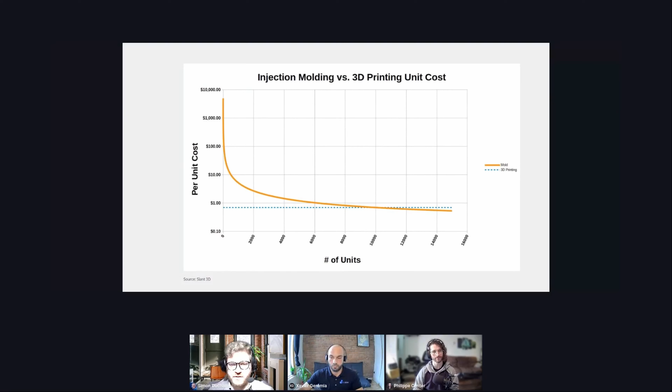Even if 3D printing is gaining more ground, there are still some barriers to implementing it in industries. The principal reason is the high initial cost of additive manufacturing, but also the quality of printed parts not being good enough. One interesting barrier is the general perception that material choice is too small.

We'll see later on, but these are specifically the aspects that can be solved by using what we call high flow rate 3D printing technology. Besides the barriers to adopting 3D printing, actual additive manufacturing users generally want a better and bigger portfolio of 3D printable materials, but would also want more reliable technologies and more sustainability.

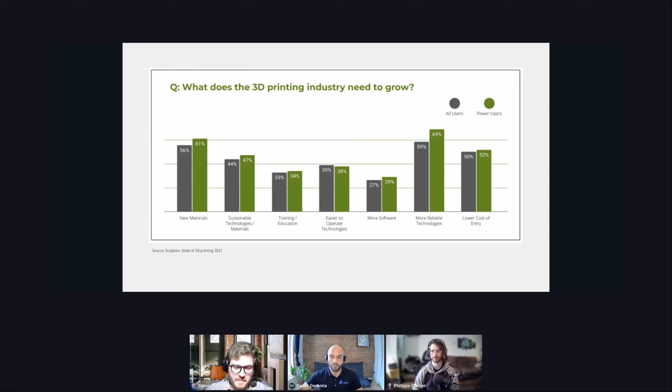When it comes to the additive manufacturing industry, there are mainly 7 technologies: material extrusion, vat polymerization, material jetting, binder jetting, powder bed fusion for polymers and for metal, direct energy deposition, and sheet lamination. I won't go and explain each technology, but I simply wanted to state that today's webinar will be focused solely on material extrusion technology.

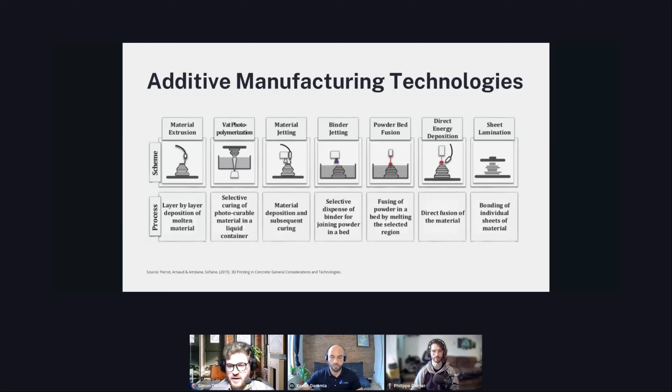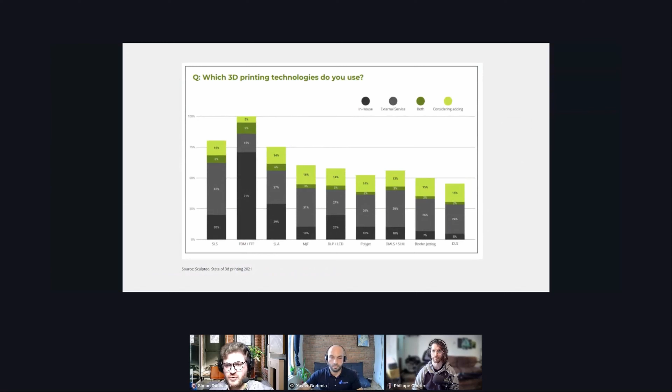To note, still today material extrusion is the more commonly used technology, both by in-house manufacturing departments and by external services like 3D printing service companies.

That's what leads us to talk in more depth about the material extrusion technology, commonly known as fused filament fabrication, fused deposition modeling, or fused granulate fabrication. There's still a lack today of standardization regarding naming conventions, but we generally prefer to talk about MEX, or material extrusion, rather than using each term that refers to a subtype of the material extrusion technology.

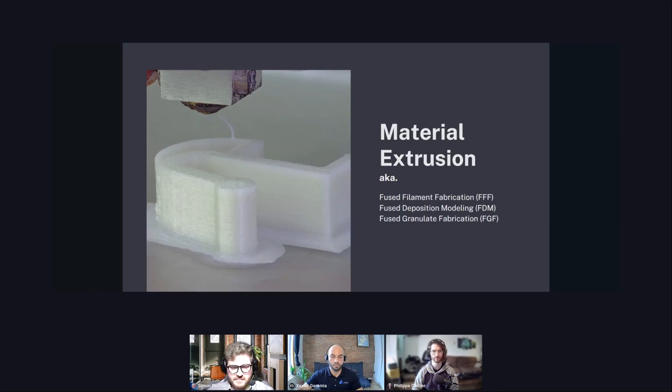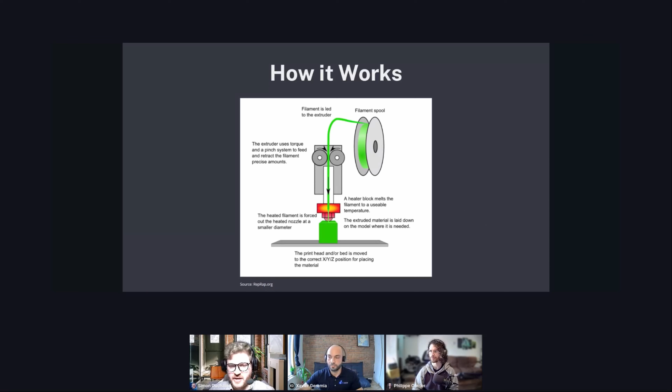So what's material extrusion? In short, it's a process where a raw material is taken, in the form of a plastic filament, but sometimes it could be powder, pellets, or paste. That material is fed through an extruder, a mechanism that moves the material to a melting zone. In this example, the extruder is a pinch system grabbing the filament and bringing the material into the melt zone, sometimes called a hot end, and deposited through a nozzle on a surface to create a shape layer by layer.

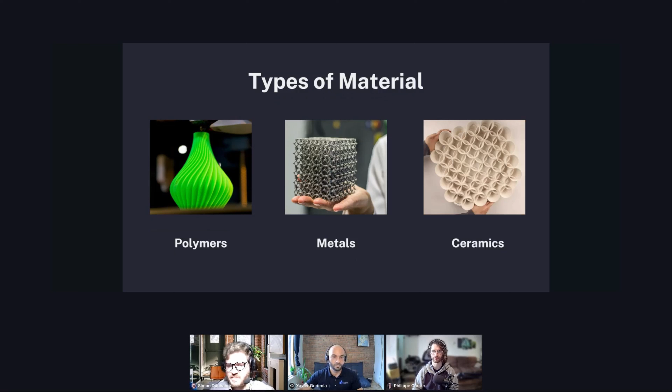In material extrusion, different types of material can be used. The most popular being polymers, but metal is also possible with material extrusion technology, as well as ceramic. And in more exotic applications, you could see bioprinting or even food printing.

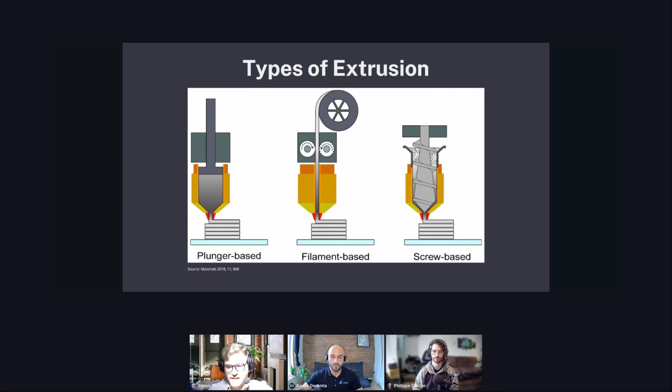And then finally, there is the screw-based type, where you use powder or pellets. Basically, it's a motor that turns an endless screw to move the material all the way through the melting zone.

All that said, let's go to the second part of that webinar. But before diving a bit deeper into our main topic today, high flow rate printing, let's take a few moments to go over the different types of 3D printers being used nowadays in industrial applications and see why high flow extrusion is a critical factor when it comes to small production runs.

Let's dive a bit more into each printer segment and see the pros and cons of those printer types. Please take into account that this is our own segmentation, as there is yet no official segmentation. Some would provide different printer types based on printer cost, others on material type, things like that. Here we decided to segment based on the form factor, or rather the build volume of the overall machines.

So the first one is the desktop 3D printer. It's a good pick for printing small parts with high resolution. The extrusion system is generally made to print layers and shells with a nozzle of 0.4 millimeter, making the surface finish almost not visible. In the case of the desktop printer, having a high flow extrusion system isn't necessarily critical. You could still get reasonable printing time for larger pieces, but as an indicator, it would take about 500 hours to completely fill the build volume of, let's say, a Prusa printer, with 0.3 to 0.4 millimeter width shells.

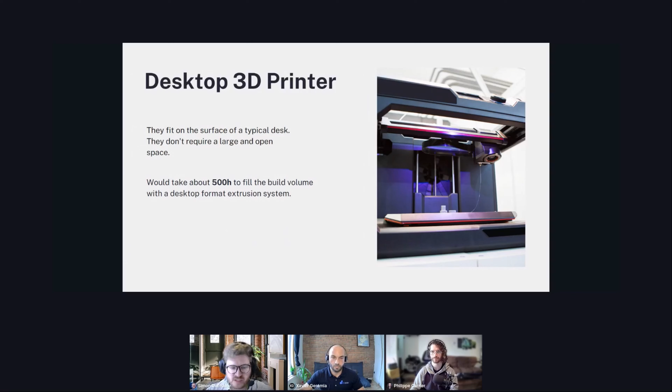The second one is what we like to call the industrial 3D printer, basically a mid-sized machine from 0.5 meter to 1 meter build volume. Unlike most desktop machines, it can take high temperature material or any advanced material due to the heated environment or abrasion resistant components. Generally it's a bit more reliable, as most of the time industrial 3D printers use better quality components. However, they are somewhat costly and you need expertise to operate those kinds of machines.

For those mid-size printers, considering a high-flow extrusion system might be a good idea. Using the same indicator as the desktop printer, we calculated that it would take 6,500 hours, so about 8 months, to completely fill the build volume with a desktop format extruder. That's basically 13 times longer than a desktop printer.

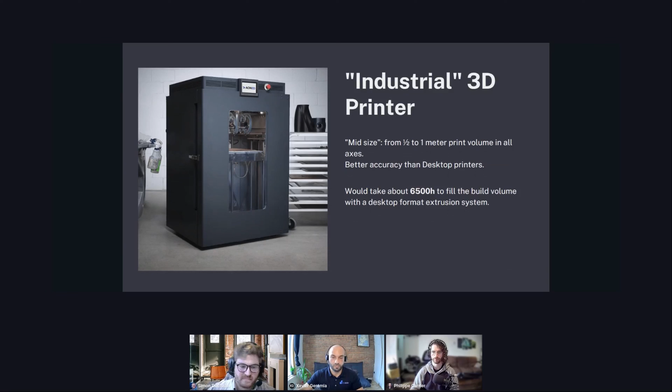The final type is the large format 3D printer. It's all in the name. Those machines are designed to print big pieces all in one part, or multiple pieces on the same machine. If you're looking for high resolution pieces, it can actually do it, but generally you'll pick that kind of machine for printing bigger parts where resolution isn't the main goal. You'll use nozzle sizes like 1.2 millimeter and print bigger shells.

The problem is that most of the time, the extrusion system used on those machines is inadequate for a large format. As an example, using the previous indicator, it would take more than 36,000 hours to completely fill the build volume with a desktop format extruder. With a large format 3D printer, using a high flow rate extruder is really critical.

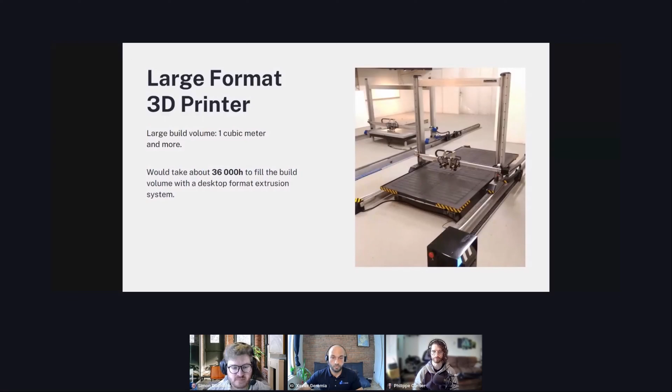Now let's cover the core of today's presentation: high flow rate 3D printing. High flow rate doesn't necessarily mean high movement speed. Building a part faster can consist of layering thicker layers on a regular 3D printer that isn't designed for tremendous acceleration and travel speed. There are many advantages to thicker layers, both for the machine design and the part strength.

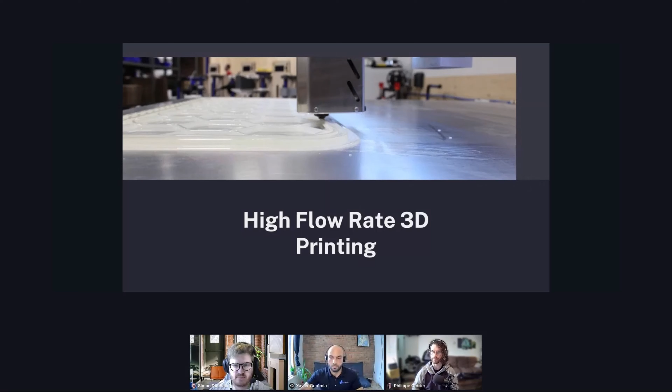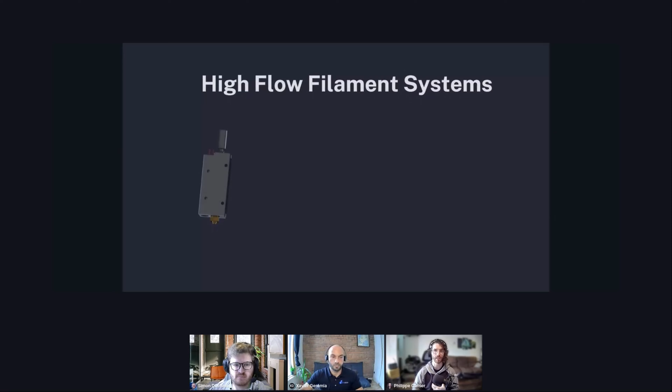I'll start with filament-based high-flow extrusion and then follow with pellets-based high-flow extrusion. One way to increase productivity is using a high-flow or high-output filament extruder. The extruder throughput is the limiting factor for printing speed, where a printer can easily move the carriage faster than the extrusion system can deposit the material. Using a high-flow extruder removes this bottleneck, each printer being able to make a 3D printed part faster.

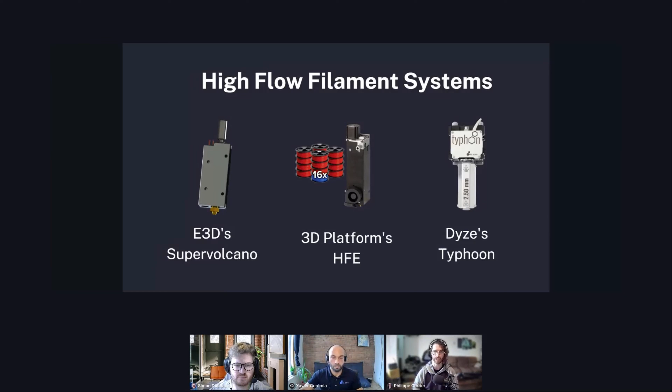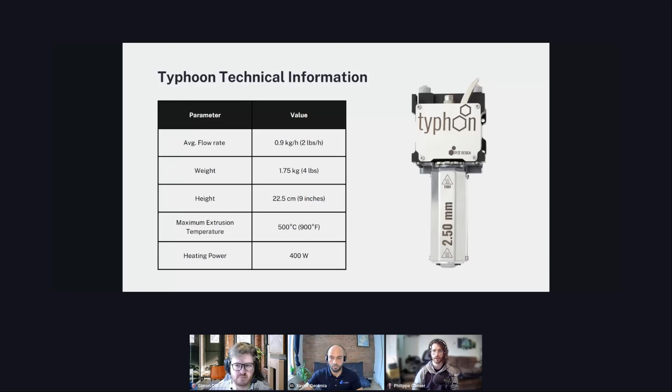There are already a few solutions on the market, each with their own advantages and disadvantages: E3D Supervolcano, 3D Platform's HFE, and our own Typhoon extruder. Typhoon is described as a high flow and fast print all-in-one extrusion tool head specifically designed for industrial large-scale 3D printers. This print head is designed to extrude 2.85 millimeter filament, is compatible with standard firmwares, and is capable of delivering an average flow of 200 cubic millimeters per second, which is about 0.9 kilogram per hour. This means quicker print at high deposit rate.

High flow isn't all about volumetric flow rate. It's also about constancy. An extruder like the Typhoon has a quad drive system for a reason. As you can see on the graph on the right, both single drive and dual drive systems suffer from a drop in efficiency the faster they go. It translates to inconsistent line width through the print, making it harder to obtain precise dimension when the throughput isn't predictable. This is the reason why the Typhoon has 4 driving wheels for fast and predictable flow.

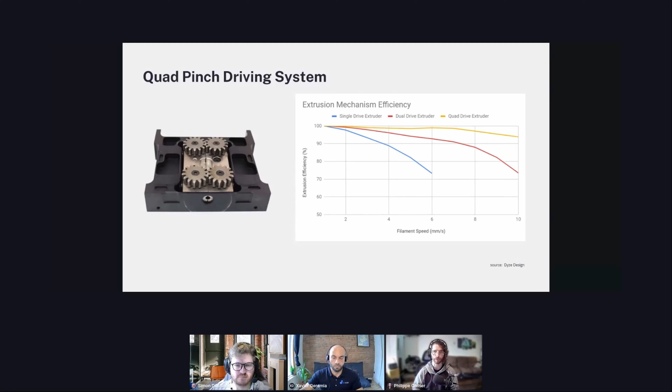If we compare the Typhoon to a standard hot end like our Dyzend X, we see about 6 to 10 times faster flow. Both extrusion systems are using the biggest nozzle available to them. We can also see that the Typhoon throughput scales much better with temperature, thanks to the dual heating and longer melting zone.

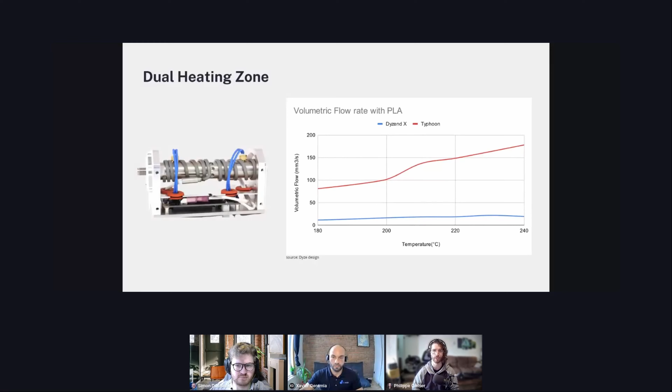We advertise the Typhoon as 200 cubic millimeters per second, but that's an average flow rate because, as you can see here, the Typhoon can reach a bit more or less depending on the specific material you're printing. The amount of heat required to melt, the viscosity, the added fillers, and the coefficient of friction are parameters that affect the maximum output flow.

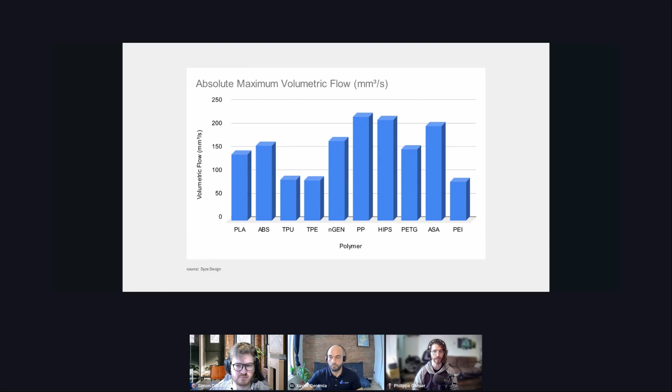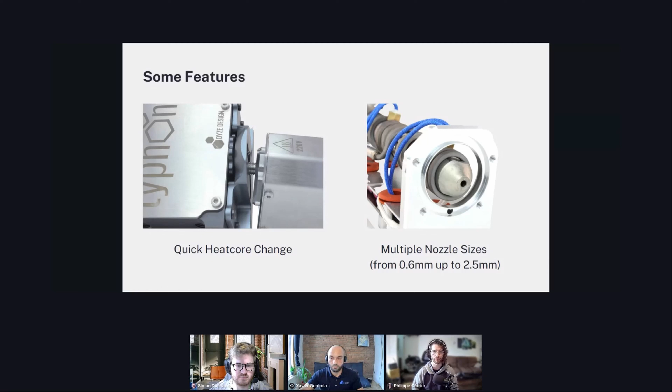Each heat core can be switched easily with a knob turn, removing the whole heat core rather than the nozzle prevents any leaks or problems from end user manipulation. The abrasive-resistant nozzle prevents any changes in nozzle size and height during a large print with abrasive filaments. Sizes are available from 0.6 millimeter to 2.5.

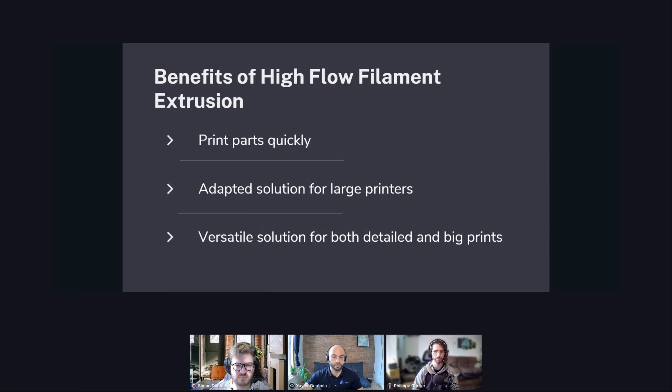So in brief, here are the benefits of a high-flow filament extrusion. As we've shown with the benchy boat, you can greatly increase your productivity by reducing the print time, reaching a high deposition rate. The Typhoon is a well-adapted solution for any big-scale 3D printer. It doesn't need a special printer with super fast-moving axis. And with the easy swappable nozzle from 0.6 up to 2.5 millimeters, the Typhoon can be adapted to any situation.

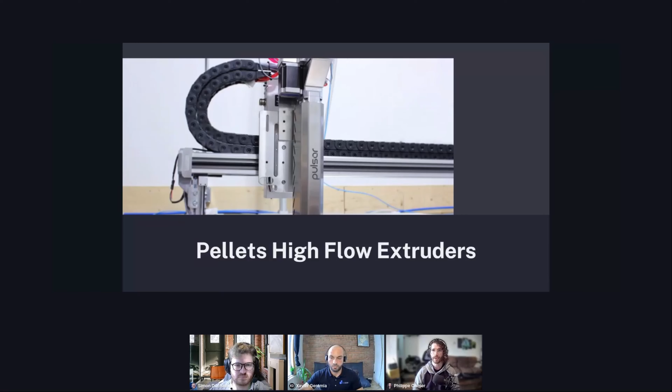Now let's talk about the pellets extruder. It's another good way to increase profitability in material extrusion. An extrusion screw is able to melt polymer much more efficiently, thus can reach much higher flow rates. Using pellets has another benefit: the cost of raw material is on average 8 times lower when using virgin resins, and even lower when using recycled polymers. Here are some high-flow extrusion systems available on the market.

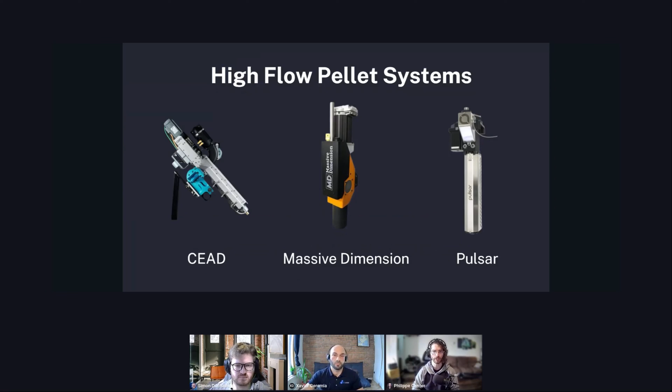You have the CEAD pellet extruder, Massive Dimension, and our own Pulsar extruder. There are a lot of different pellets-based systems out there, all with their own specific maximum flow rate, weight, and size. The choice of a system will greatly depend on your maximum payload. Generally, the bigger the size, the higher the flow rate.

The Pulsar is a state-of-the-art, large-scale and high-flow plastic pellet extruder. It was designed with one purpose in mind: 3D printing of parts of 1 cubic meter and more, as quickly and cost-effectively as possible. The Pulsar is compatible with any large-scale 3D printer and robotic arms, and is able to output on average 2.5 kilograms per hour of material.

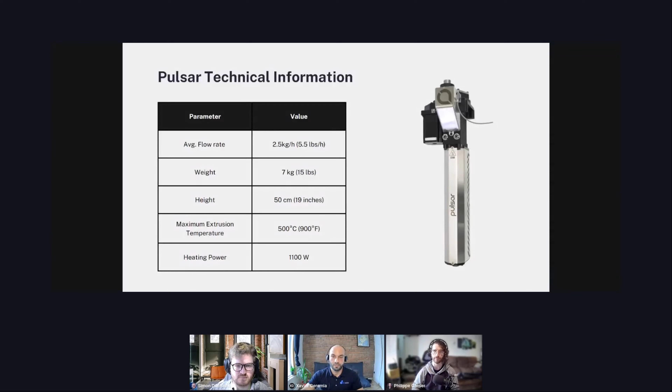The customized screw design is optimized for 3D printing with high resolution. The screw is manufactured in-house using heat-treated alloy steel, then coated for optimal wear resistance.

The triple heat zone design ensures the polymer is at the right temperature at the right place. The top section receives cold pellets and generates more heat to melt them. Then the middle zone stabilizes the polymer at a precise temperature. Finally, the nozzle heater ensures an even flow.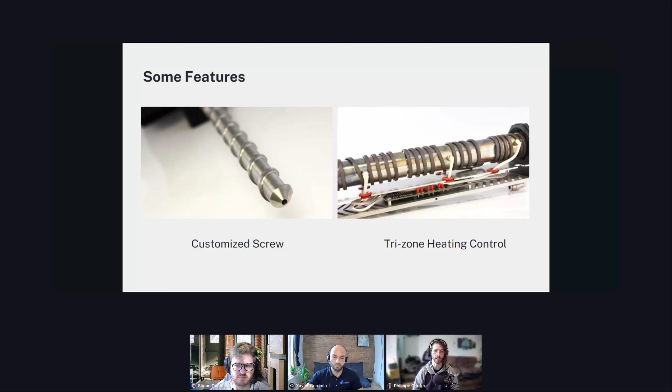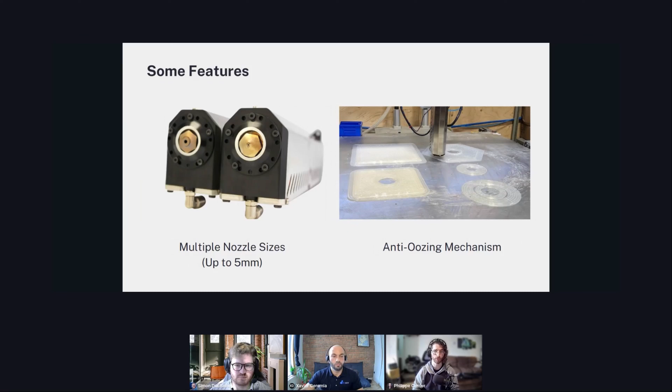Similar to the Typhoon, the flow rate depends on the material you're trying to extrude. With PLA, for example, the Pulsar can reach up to 3.3 kilograms per hour, or 7.5 pounds per hour.

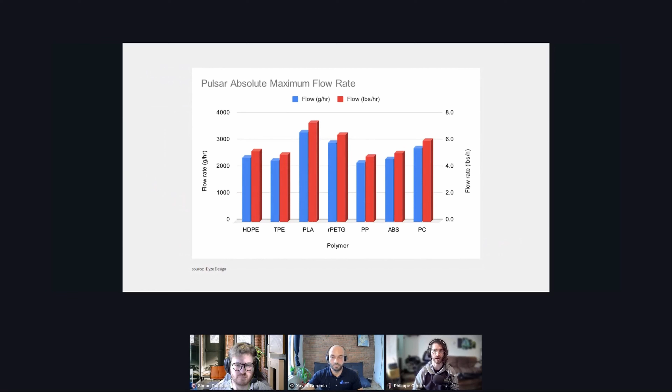One interesting thing about a pellet extruder like the Pulsar is how fast you'll be profitable. Let's take an example of PETG. A 1 kilogram spool costs about $35 per kilogram, while 1 kilogram of resin is about $8 when bought in small quantities. After only 130 hours of printing, you've basically made your money back. You basically save more than $60 per hour by using the Pulsar rather than a filament extruder.

Pellets are very easy to acquire. Even if you need small quantities, there are many suppliers such as Chase Plastics, NatureWorks, and Push Plastic. They can provide resin in bags starting at 1 kilogram up to a ton if you want. Resin can also be bought from other distributors, usually found in 1,000 kilogram quantities, and the price is even more advantageous. We can also provide an automatic pellet feeding system to get the pellets from the container to the extruder, and a standard pellet dryer can be added to the feeding loop when the resin is hygroscopic.

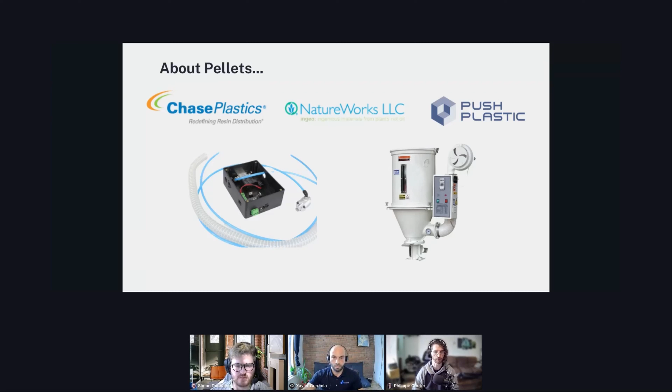So in brief, here are the benefits of high-flow pellet extrusion. The Pulsar is actually 3 times faster than the Typhoon, which again is a great solution for big parts that need to be printed in record time. The Pulsar is highly weight optimized and has a throughput-to-weight ratio 3 times higher than the closest competitor, which makes it ideal for a robotic arm where payload is a critical factor. When printing parts that require dozens of kilograms of polymer, saving on raw material makes sense. As we've shown previously, the Pulsar would pay for itself after a few hours of printing.

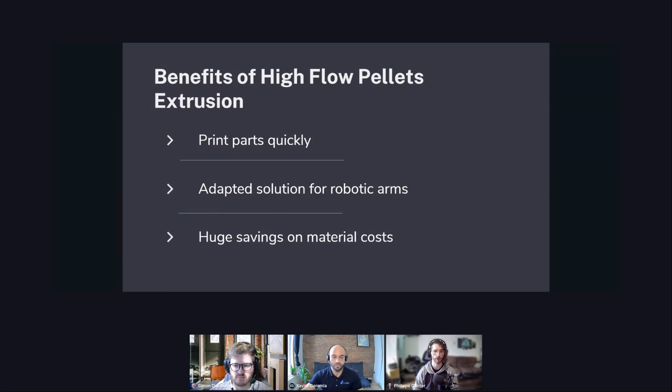Can you tell us more about the robotic arm?

Yes, Phil, I can take that question. And I see in the chat that Peter is asking almost the same thing. So let's cover that topic.

The Pulsar, with a weight of 7 kilograms, can be implemented on almost the smallest robotic arm you can find on the market, even small cobots like Universal Robots. Basically, it's quite easy to integrate using the provided stepper motor driver and the provided solid state relays. All you need is some kind of controller that can output direction and steps for the motor, and then some kind of temperature PID to control the heaters. Beside that, one thing to note is that, as we've shown in the picture, you have some kind of heat shield around the Pulsar. It might make it harder to have wide angles when you print, and that's a question Peter asked here. So we plan, and we're working right now, on what we call the non-planar version of it. It's an iteration of the same design where we'll add some clearance around the nozzle to make sure you can print at different angles when you rotate it with a robotic arm. We still have some customers right now printing with a robotic arm, but as I said, because of the clearance, you can't really reach the maximum orientation you could with the non-planar version. But we're working on that right now.